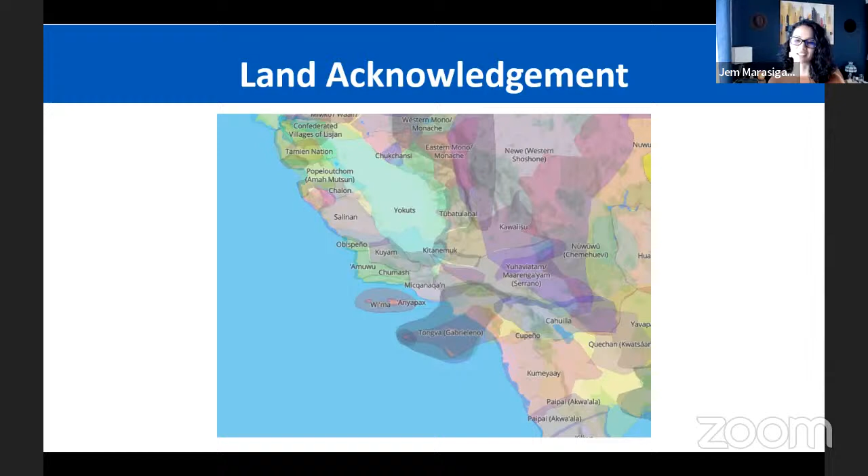Absolutely, and thank you so much, Jem, for incorporating this—it's beyond just the CERP. There's so much that overlaps with all the efforts you are all involved with. Thank you, Jem, for reminding us of many great things. I appreciate that, and I want to welcome and thank you all.

Much of the presentation we will share, which is much of the agenda tonight, is really a result of all the robust feedback we heard in January. So I want to thank you all for the constant engagement and constant feedback.

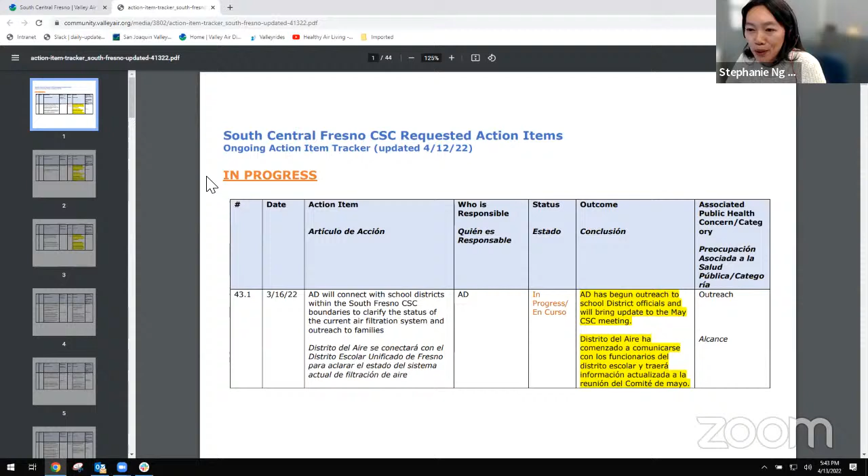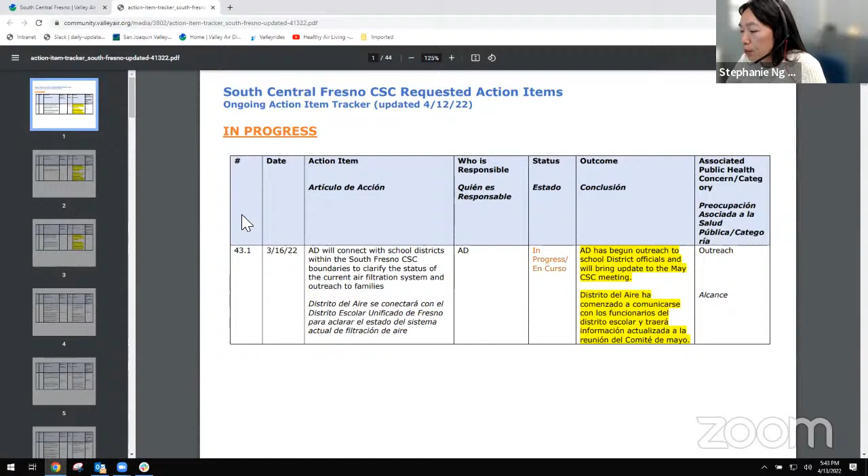One of the first ones in progress is that the Air District will connect with school districts within South Central Fresno's CSC boundary to clarify the status of current air filtration systems and outreach to families. The Air District has begun this outreach to school district officials and will plan to bring an update to the May CSC meeting.

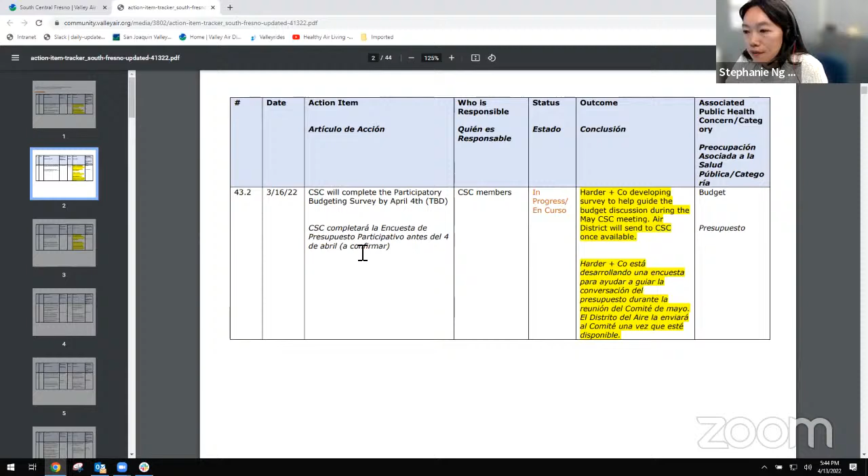This next item still in progress: the CSC will complete the participatory budgeting survey we're working towards for our next upcoming meeting in May. Harder & Company is working with our co-hosts to develop the survey to guide the budget discussion during the May CSC meeting, and we will send it out once it becomes available.

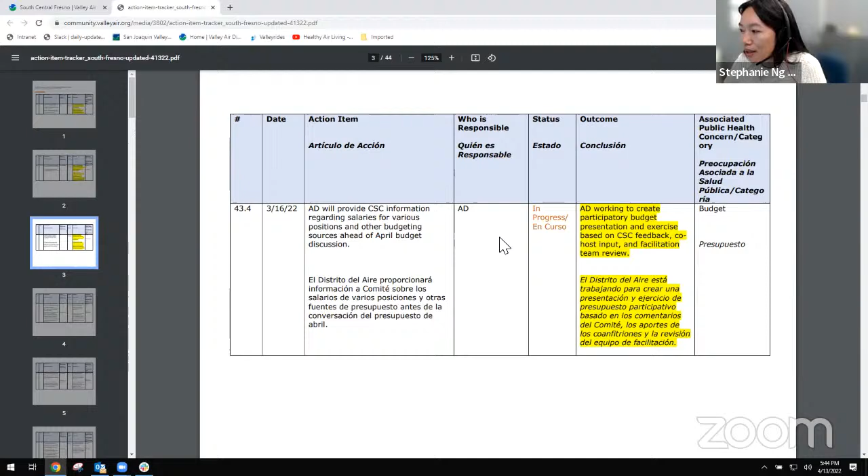Another item: the Air District will provide CSC information regarding salaries for various positions and other budgeting sources ahead of the April budget discussion. The Air District is working to create a participatory budget presentation and exercise based on CSC feedback, co-host input, and also our facilitation team.

We do have a handful of items still in progress from a couple of meetings back—one of those being analyzing the lab results of the Vitro architectural glass pile inspection, and also regarding the truck reroute study that our city officials hope to bring to the next city council meeting.

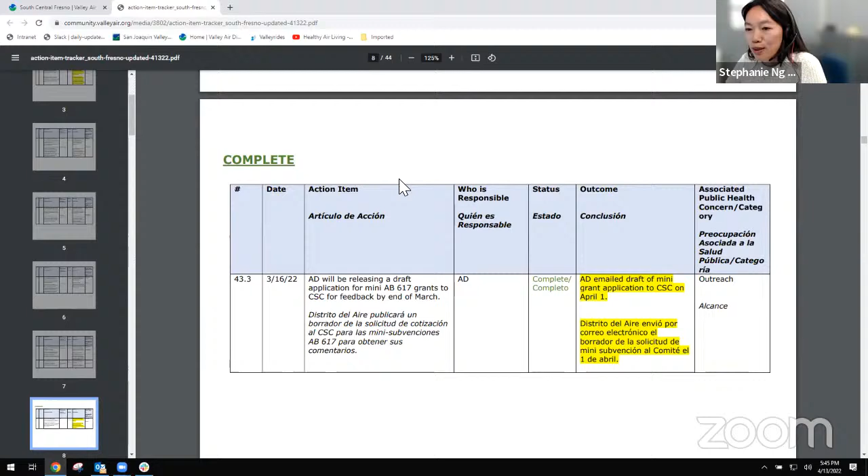I'll move on to some of the completed items that happened recently. One of those was that the Air District did release the AB 617 mini grant application draft to the group for feedback—if you have feedback on that, please feel free to send it our way. The hope is to get this actual application out to the community later in April.

And then these next couple of items, I won't go through all of them because they're all related to tonight. A couple of items we've had in the past regard this stationary source presentation that was given in May, providing lots of additional information to it, including information on sensitive receptors and all that good stuff that we'll actually hear tonight.

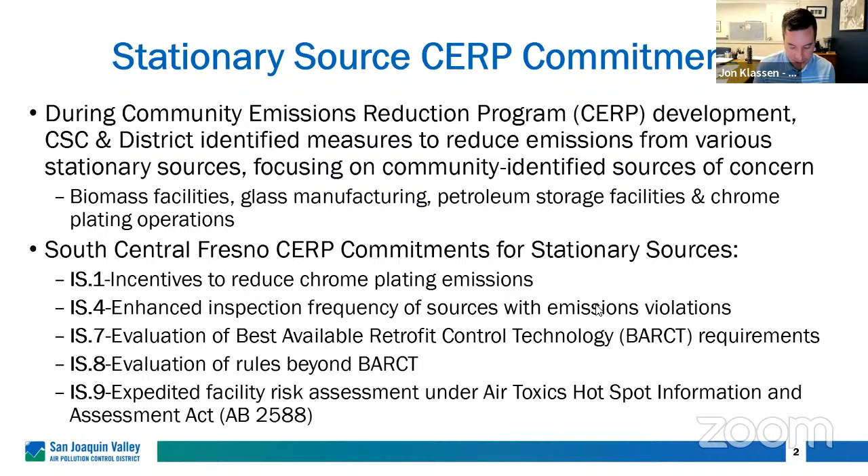Just a little bit more background on the different types of pollutants addressed through our CERP commitments for stationary sources. NOx emissions are important for the formation of both ozone and PM 2.5, so getting NOx reductions is key to reducing both ozone and PM 2.5 concentrations.

NOx emissions can come from combustion of fuel, mobile sources, or industrial sources. Directly emitted PM 2.5 can come from cooking of different types of food, burning wood, road dust, or other industrial sources. SOx emissions are also a precursor to the formation of PM 2.5, and can come from the burning of fossil fuels.

VOCs, volatile organic compounds, are important for the formation of ozone. These can come from cleaning and surface coatings, architectural coatings, and industrial sources.

And then air toxics, which can be hundreds of different types, from diesel particulate matter from combustion of diesel fuel, primarily from heavy-duty trucks, to different types of BTEX VOCs which come from oil refining and petroleum products, to many other things that can be addressed through this process.

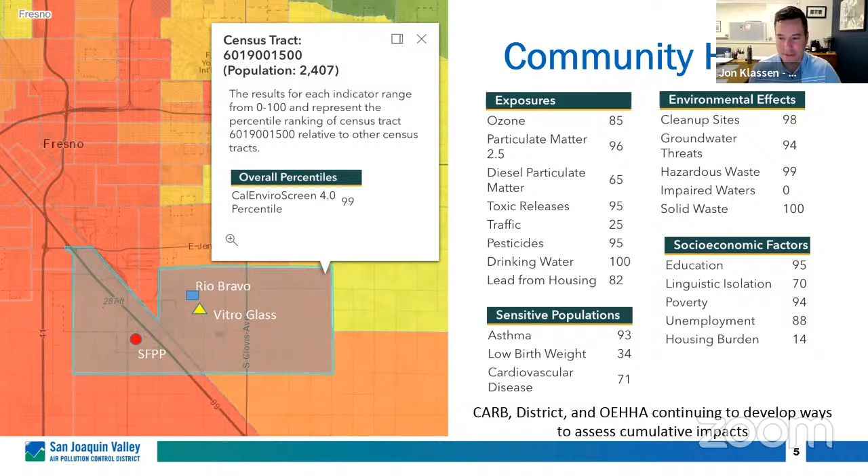We talked about Vitro Architectural Glass a few months ago in January, had a good discussion, lots of questions. I did want to note that we have people from our permits team and our compliance team here who can hear the discussion. They can help answer questions if you have thoughts on emissions information or enforcement activities. So we've got a good team here to help provide more information if you need it.

Just a little background on this facility, Vitro Architectural Glass. It's near the southwest corner of Peach and North. We show it on the map here in the middle, a general area of where it's located. To the right, we show another map with Malaga Elementary School, about 0.9 miles away from Vitro Glass. This is a glass manufacturing plant that focuses on flat glass used in windows and other applications.

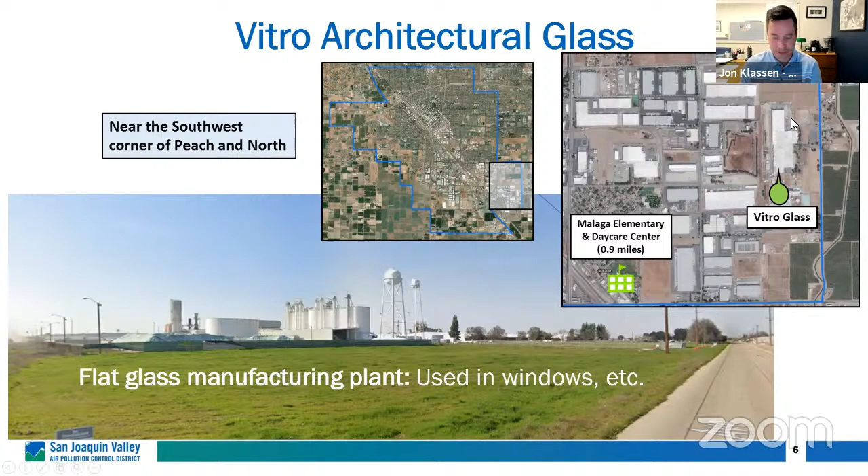This is one of the pieces of information that was asked for last time, thinking about the emissions from this facility in relation to the emissions as a whole within the South Central Fresno AB 617 community boundary. So that's what we have here. We're showing the emissions for NOx, VOC, and PM 2.5. If you start on the left-hand side, you can see the emissions for Vitro Glass for NOx is that green color in the first pie chart.

You can see how that compares against the rest of the different sources of NOx within South Central Fresno. Vitro Glass NOx is about 13% of the total across the entire community. Going to the right, for VOC emissions, Vitro Glass is about 3% of the community total. And for PM 2.5, Vitro Glass is about 6% of the community total within South Central Fresno.

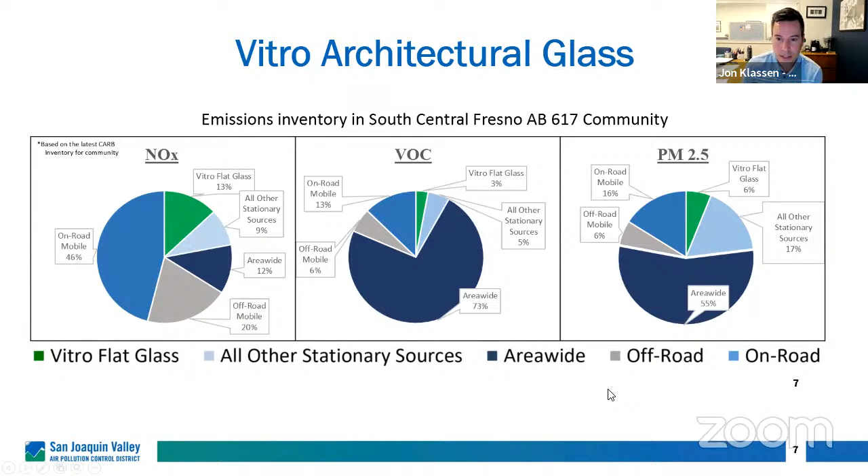Looking at this over time as well - this was one of the other comments, thinking about instead of just the last year of emissions, how has this changed over time? Have things gone down? What progress have we seen? So what we're showing here for this facility is NOx, VOC, and PM 2.5 over time. On the left-hand side of the table and chart below, the first year is 2010, and then we go forward to 2016, 2017, 2018, and most recently 2019 and 2020.

You can see below in the line chart, NOx is the blue line there, and those emissions have been reduced pretty significantly over the past 10 to 12 years, over this time period. You can also see the trend of VOC and PM 2.5 emissions as well.

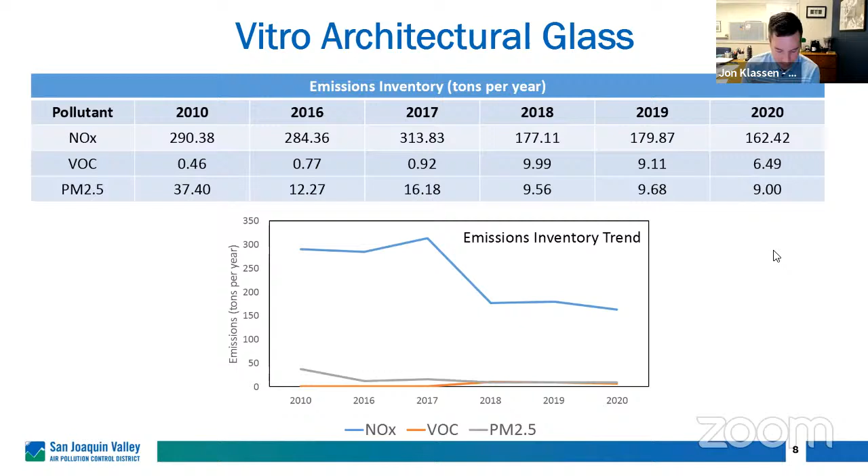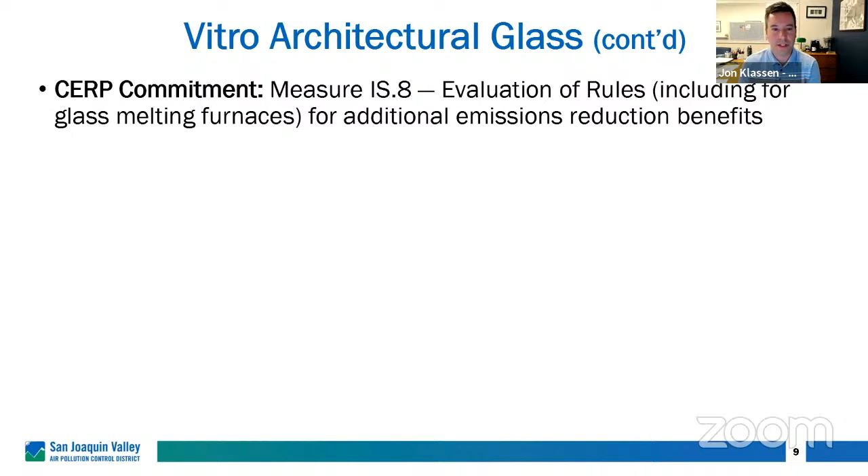Going to the next slide, looking at the CERP commitments related to this - IS.8 is the evaluation of rules, including glass melting furnaces, for additional emissions reduction benefits. We actually did amend this rule in December of last year, 2021 - amendments to our Rule 4354 for glass melting furnaces. This rule's requirements first began in 1994, and it's been amended 6 times, with NOx emissions already reduced by over 75% before this latest amendment a few months ago.

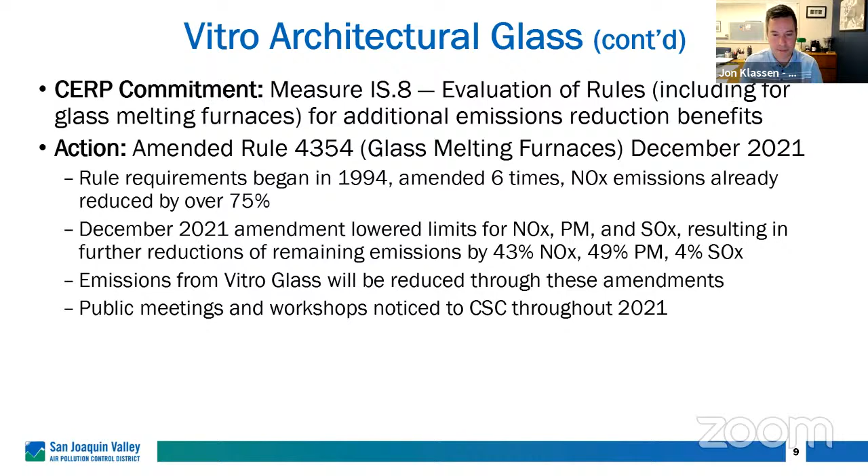In this December 2021 amendment, we lowered limits even further for NOx, PM, and SOx, resulting in further reductions of the remaining emissions by another 43%, 49%, and 4% for NOx, PM, and SOx respectively. Emissions from Vitro Glass will be reduced through these amendments, with them having to put on more controls over time. We had public meetings and workshops through this rule process, and kept the steering committees informed as we went through this last year.

Now looking specifically at some of the inspections that have happened over the past 3 years - the CERP measure IS.4 says the facility is subject to enhanced inspection frequency due to having an emissions violation within the last 3 years. So we included some details here on what those violations were.

I'll read them briefly. In April 2019, there was an NOV issued for an exceedance of the maximum differential pressure on a dust collector serving the train shed. In June 2019, a failure of the dust collector serving the sand scale in the basement. In August 2019, leaking soda ash in the underground receiving pit and leaking material discharged from the mixer level dust collector. Also in August 2019, receiving sand while the train shed dust collector was not operating, and insufficient dust control in the batch house basement. Then in April 2021, unloading material while the dust collector was not operating, and again insufficient dust control in the batch house basement. Because of that, they are now subject to enhanced inspection frequency due to these violations.

So I'll go ahead and stop there. That was a summary for Vitro Glass, more information than what we talked about last time. We can stop there and see if the group has any questions or comments.

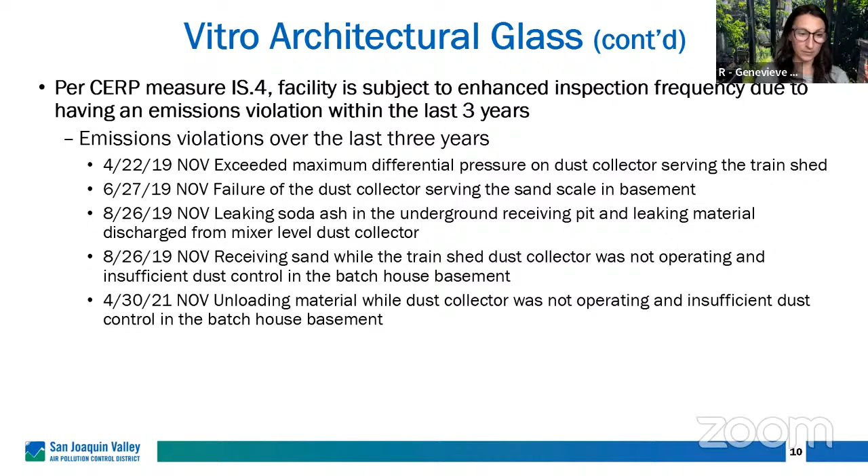Lisa, then Naemin. Yes, I just had a comment actually to the gentleman that's representing the business. First off, thank you for coming and having this conversation with us. I think it's been much needed, and I appreciate your input and your viewpoint. But I also want you to think about this. There's a home very close to there, and I always think about a mom making an apple pie and opening up their windows because the kitchen's too warm, and there's a nice, lovely breeze. And whatever you have sitting there is blowing in the wind onto that apple pie where people are ingesting it.

So I would like to remind you, what is the value and the cost of a life? I would hope that you would go back to the owners, because I do understand you're new at this job, and remind them that they also have a civil obligation to the community and the people that live around that facility. I personally believe that all your raw materials should be inside of a structure. They shouldn't be able to be floating in the air. That's just my opinion. And once again, I want to thank you for your time and your willingness to listen to our group. Thank you.

Yeah, I won't take much time on this item again, but I will want to echo Lisa's comment. Eric, you're new, but this is not new to that community. I administrate a reporting network that has been operating since 2013, and this has been a complaint of the neighbors that their facility has for years. And we have been knocking at every single door that could potentially ask the facility to do something about it. You know, I know you don't have the authority and all that, but...

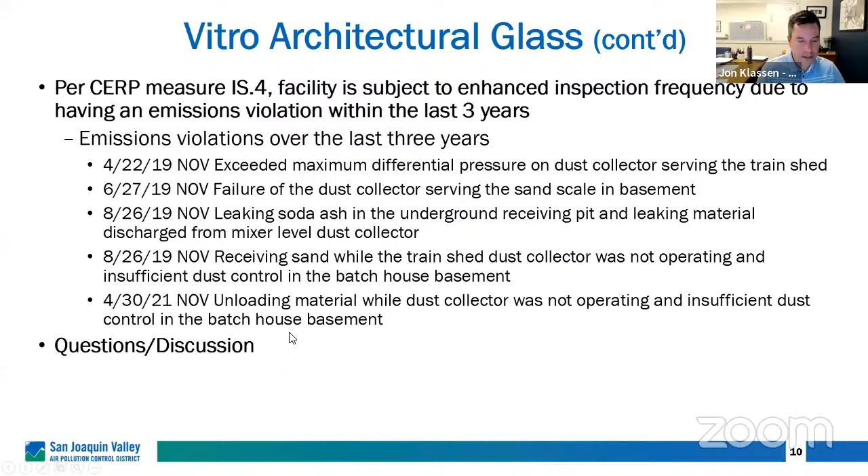All right, thank you, Genevieve. So let me advance this here. Okay, next facility we wanted to bring some information to you all on is the Rio Bravo Facility. This is near the southeast corner of Willow and North, again a similar area to Vitro in the same area.

Looking at the measure IS4, the facility is subject to enhanced inspection frequency due to having an emissions violation within the past 3 years. Looking at the details of those, in April of 2020, the driver did not connect the vapor hoses prior to loading. In June of 2020, a 5,000 ppm leak was found on the west lane. And then in August of 2020, the ladder seal had a 1-inch gap. Because of these violations, they are subject to the more frequent inspection frequency.

I'll stop there again and see if there are any comments or questions about this facility.

That's a lot. Thank you, Jon. I see Ed's hand is up.

I just wanted to make the comment that if a driver shows up at the rack and doesn't hook up his vapor control, typically the rack will ban him for life from being able to load. So he's essentially lost his job and his ability to run a fuel truck. Just as an inside piece of information, if you don't operate correctly when you're loading your vehicles, you pay a very high price.

Thanks, Ed. And to clarify, do you represent this facility? Have background info? No, I'm not Kinder Morgan, I'm Valley Pacific. We do load there, no question about that. I do know what the rules are, and there are stages of penalties for drivers that don't do things right, but not hooking up a vapor hose is a lifetime ban. You're out of here.

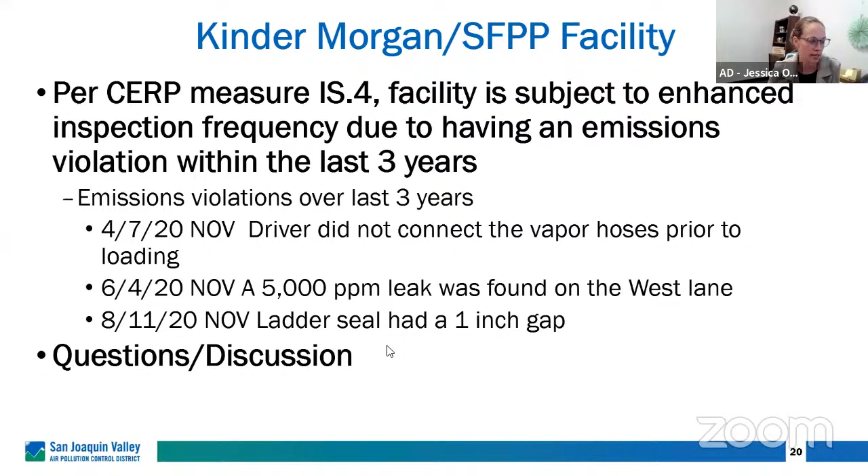Thank you, Genevieve. I want to uplift and add to some of Dr. Curry's comments and what Genevieve was mentioning in Lilia's comments. A couple of things we know we can already do, and we're already doing with your support, is monitoring very closely. You saw on that map, Jon, can you go back to the map of the Kinder Morgan location compared to Malaga Elementary?

We have that trailer that is real-time reporting BTEX, those volatile toxic compounds that Genevieve mentioned. We are reporting and tracking in real time. We did not launch that trailer prior to those 3 emissions violations, so we don't have those exact dates. But anytime we see, as we report regularly, our annual or even quarterly or weekly understanding of the data we're collecting at Malaga, we will 100% treat it as a big alert if for some reason BTEX spikes, especially at Malaga. That will let us know if there is an exposure.

I know it doesn't completely address Dr. Curry's point, but it addresses at least our understanding of impacts to a nearby sensitive receptor from the primary type of pollution coming from that type of facility.

I'll also add to Dr. Curry's other point about prevention. As a doctor, I'm assuming, and I hear it from my doctor all the time, prevention is really the best medicine. Obviously treating the symptom is our goal here at the district if we do find a violation. But one of the things we also do with our inspections is educate the facility on how not to have an emissions violation in the future. That is such an important piece.

I'm not going to say we can take 100% credit for that prevention, but you can see those are the 3 most recent violations. We've had inspections since those violations and have not issued emissions violations to that facility. So I think there is something to be said there, although we're always going to continue to work on that. That's a big piece of our job here at the district: to educate. We always talk about outreach to the communities, but outreach to facilities too, to be good stewards of their community. That's a large part of our enforcement program.

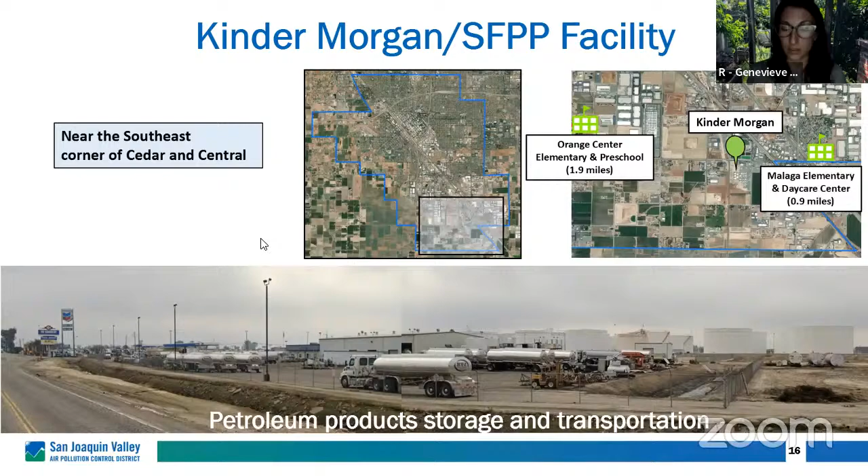Okay, it is 7:28. I think this is perhaps a good time to put a bookmark in the conversation. We still have more facilities to get through, so maybe that's our 3rd edition, and then maybe even the 4th edition where we talk about what we're going to do with all this information, and how we may amend our CERP.

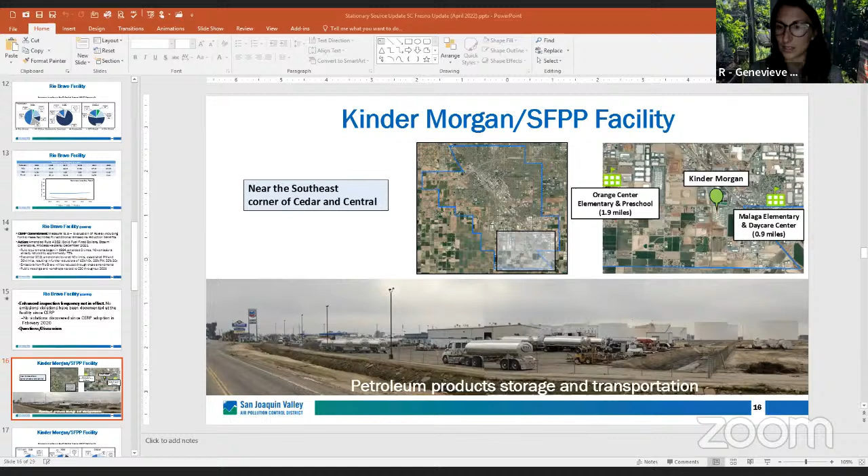How does everyone feel about that? Are we good to pass it back to Jem to finish off the agenda? I see a head nod. Okay.

Oh, it got dark. Where I am... Oh yeah, you just kind of faded out.

Thank you all for such an engaging and productive conversation. It's clear there needs to be more conversation around this, as Genevieve said, to be continued, and there will be more opportunity to continue this. In the meantime, we hope these discussions so far will lead to appropriate actions to address these concerns. To be mindful of your time, we're going to make a rough transition to a time-sensitive standing update from the truck reroute subcommittee. All other updates will be sent through email this week so we had enough time for tonight's conversation. I'm going to pass it off to Jess.

Oh, Lily, I see your hand is up. Do you have a question?